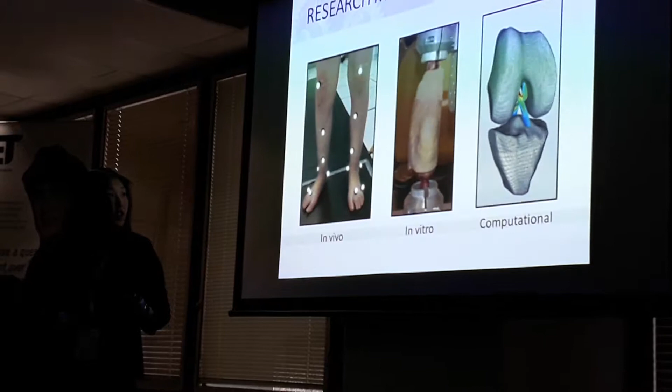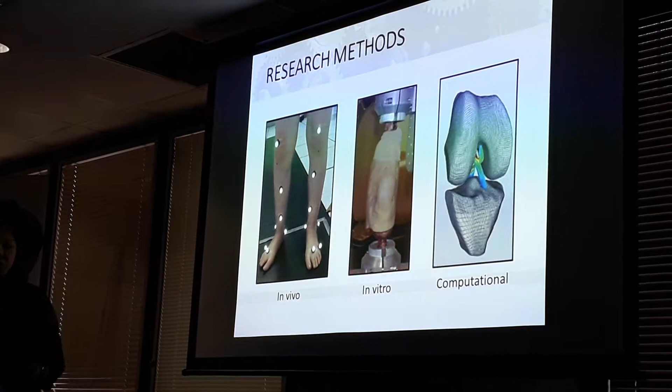So how do we test these musculoskeletal conditions? Well, either we use in vivo methods, which are experiments performed in the body, or in vitro methods, which are performed on knee joints or spinal segments, often done in a robotic simulator. Or we use computational models, which are programs that create virtual models.

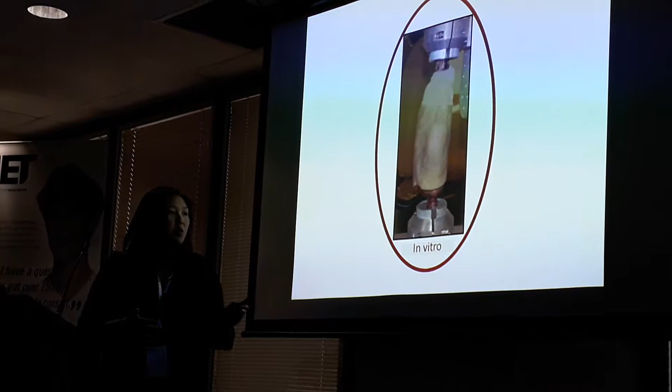So today my presentation is going to revolve around the in vitro method. These in vitro methods are really based on the capabilities of the robotic simulators. So if you have a robotic simulator which is able to simulate many different types of tests for various joints, we will be able to increase the musculoskeletal research performed in those machines.

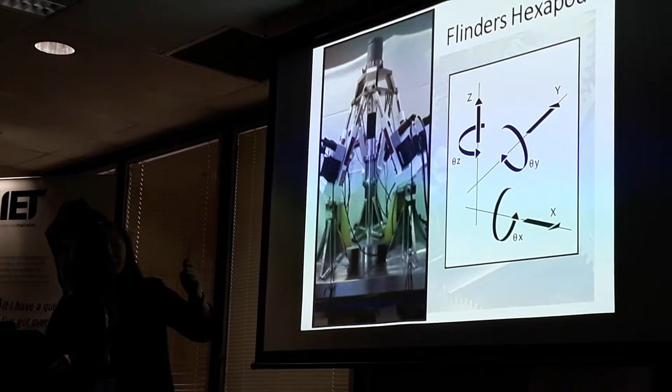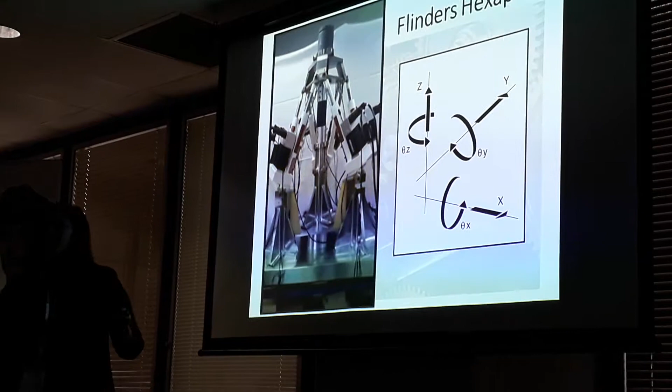So Flinders are lucky enough to have a novel Stewart platform that's supposed to be moving, which is simulated via these 6 legs that extend and retract to form 3D motion. So over here we can see the 6 degrees of freedom, 1 degree of freedom being translation or rotation around a certain axis. So altogether, that's 6 degrees of freedom.

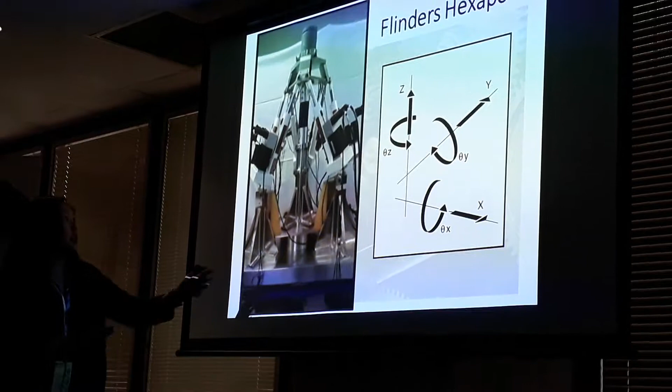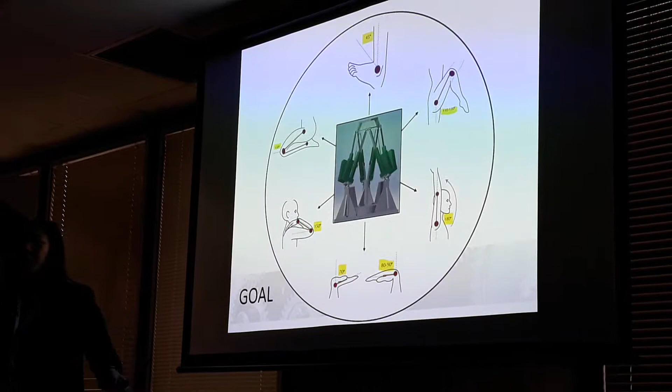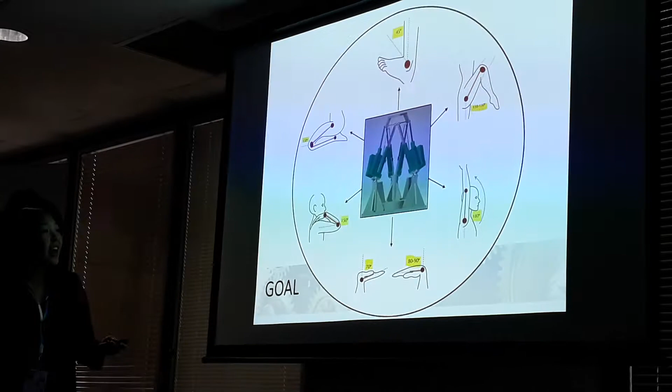It's also important to note that we place the specimen inside the inner space just here, shown by a blue box. So how cool would it be though if we could test all sorts of joints in this robot? At this stage, this robot can only extend to 25 degrees and also flex to 25 degrees. If we're able to test all sorts of joints in this robot, then we can increase the depth of biomechanical research done at Flinders University.

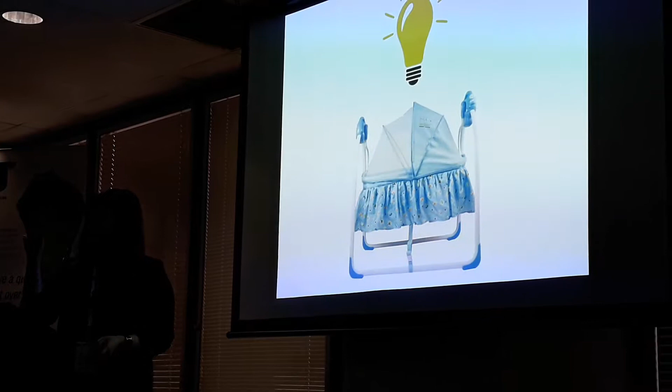So the idea behind this is a baby cradle. What does a baby cradle do? Well, it just swings like this. So we can mimic this by flexing and extending. The cradle flexes and extends to form that motion that we want. We want to place this cradle inside the inner space of the Hexapod just there.

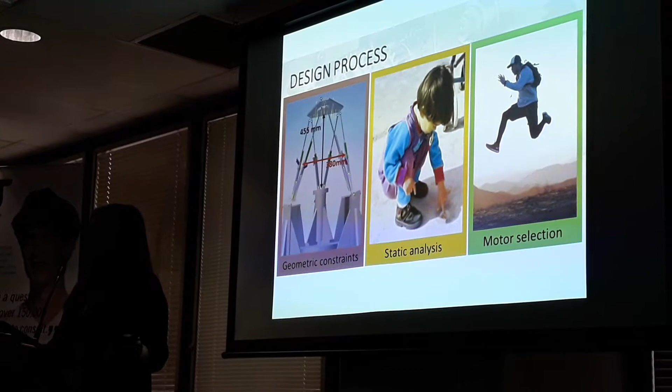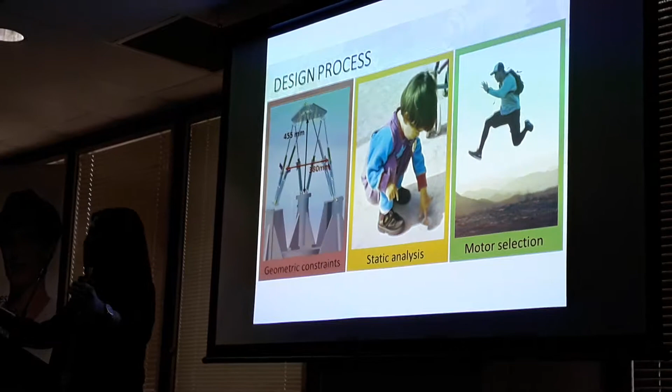So how did I do this? Well, I broke it up into 3 different parts. The first part being analysing the geometric constraints. Really, the space in there is quite tight. We only have 380 millimeters, which is roughly that big, and in height 455, which is roughly that big.

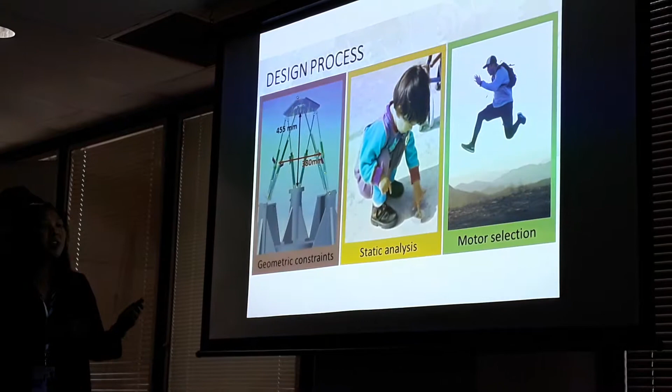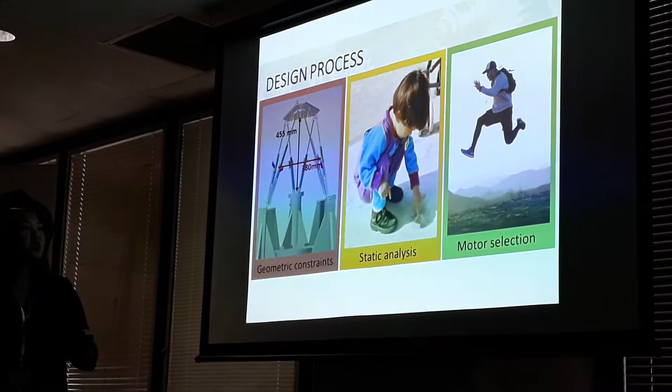So it's actually really hard because we need to analyse the kinematics of this geometry as well as identify any collision points. Second, we need to make sure that the cradle is able to withstand the static loads that might undergo during testing. Third, we also need to be able to simulate the dynamic motions that are going to occur while testing. So I'm going to go through each stage.

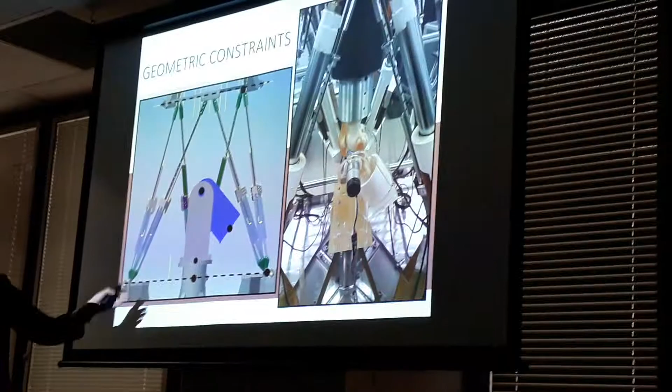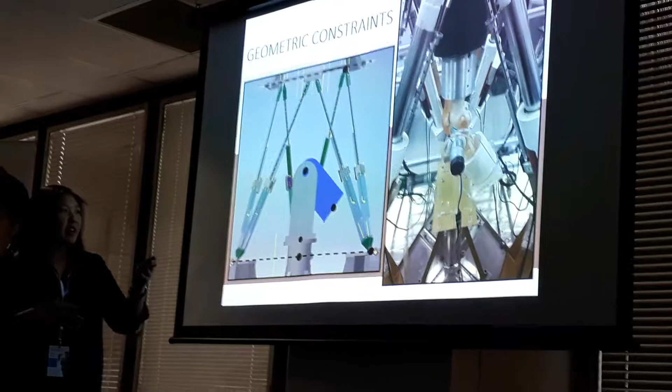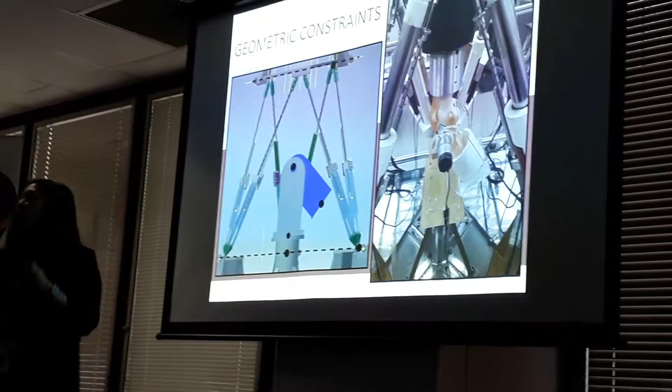So first, we can see here that the encoders and the cradle are quite close. We're going to simulate the cradle motion via Hexapod kinematics, which is based upon the relationship between the bottom encoders and the top encoders. I used 3D vector geometry to relate the cradle to the encoders, which I'll show you coming up.

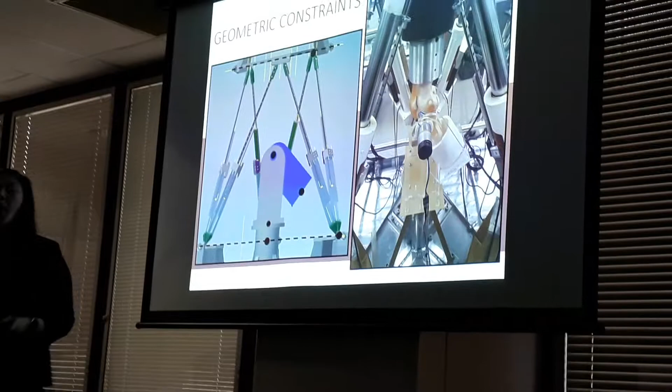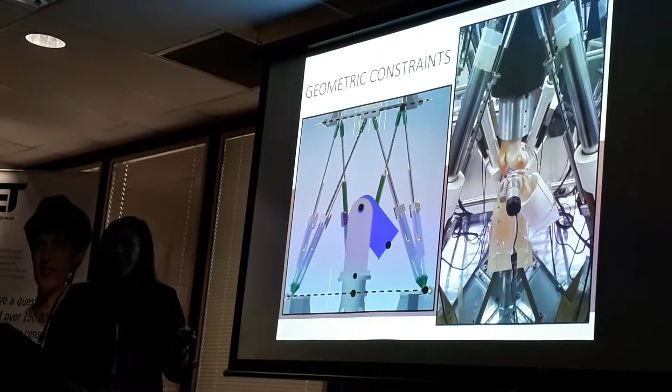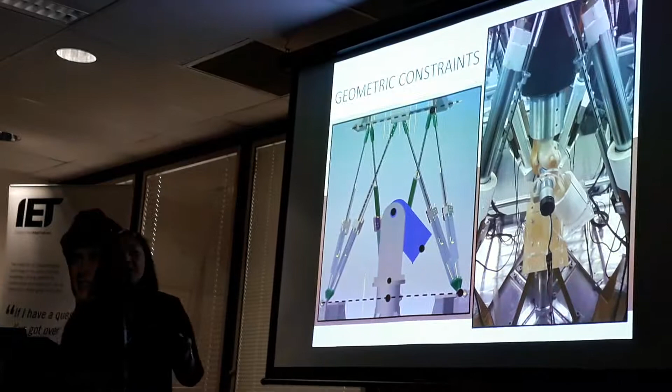But this is just obviously computational, so I had to validate it via a prototype model. So that's over here. As you can see, it's quite hard to see because it's acrylic. So while I hope to challenge your brains, I also am going to challenge your eyesight. This prototype extends and retracts and forms the geometry determined by the computational model. And there, as you can see, is a knee setup in the model.

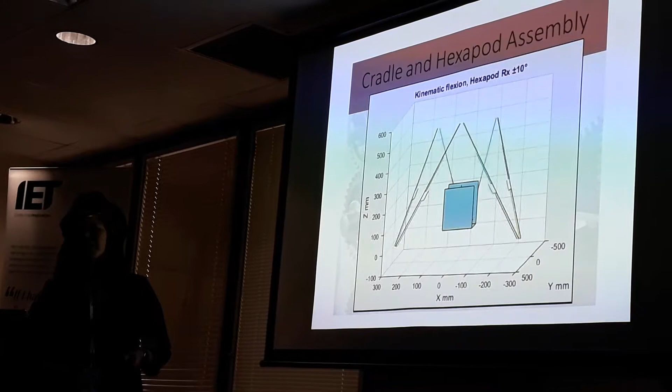So here is the model in dynamic motion. The cradle is flexing and extending in kinematic data, and the Hexapod legs are rotating around plus or minus 10 degrees.

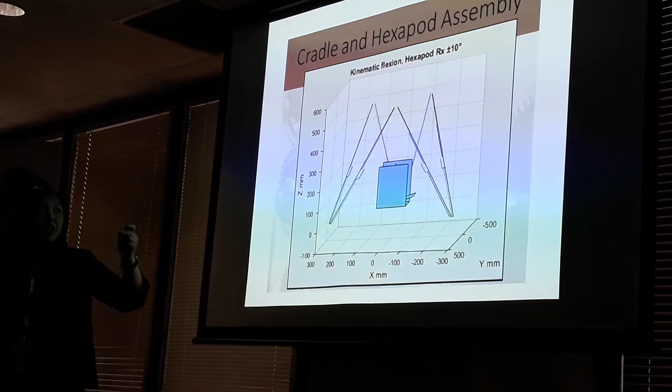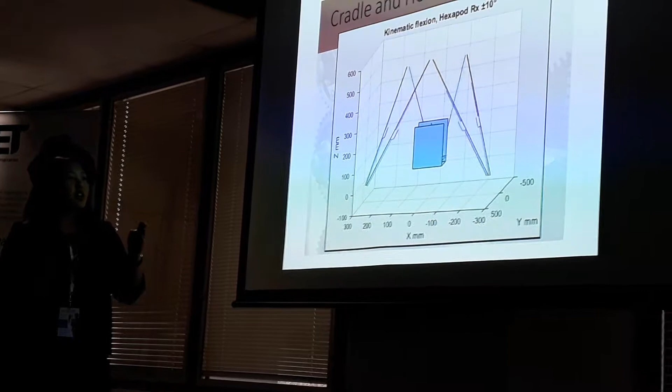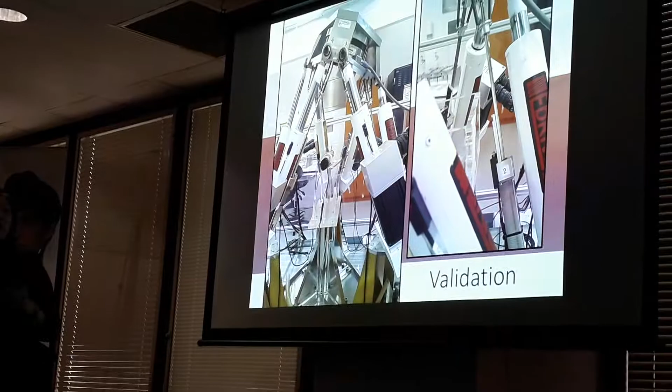From this, we can determine the distance between the cradle and the closest encoder. Basically, all we need to do is determine the encoders at their end range of motion, as well as the cradle at its end ranges of motion. I also validated that through the cradle, as you can see, it's very hard to see, and we drove the cradle to a certain position and measured it. So you've got this way, and then this way.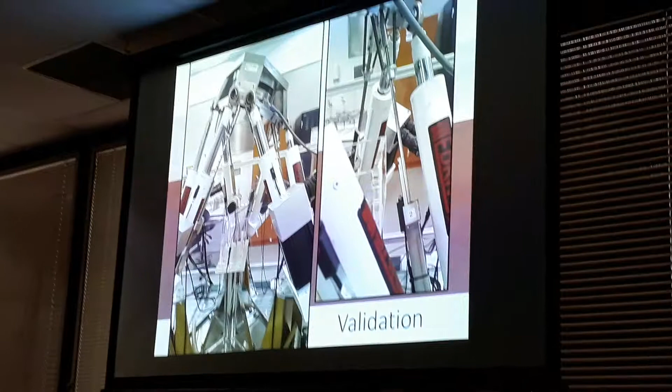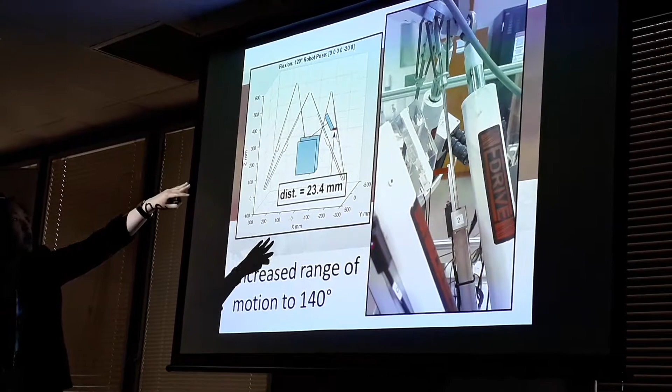So the most important one, noting that the carefully thought out cradle did not collide at any end of the range of motion. The most important part was that we increased the range of motion to 140 degrees by flexing the hexapod to 20 degrees while flexing the cradle to 120 degrees, equaling 140 degrees cradle flexion.

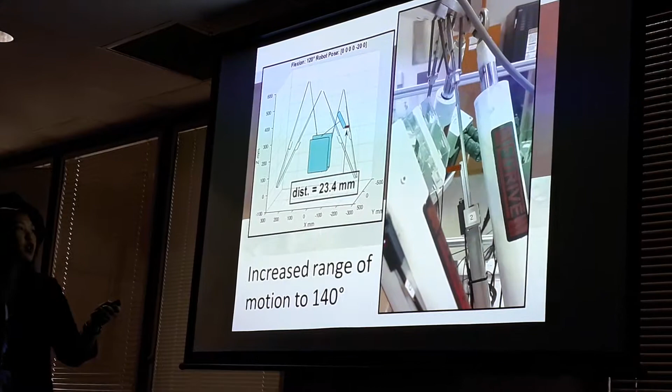As you can see via the computational model, we determined it was 23.4 millimeters. In this model, we also determined it was 23 millimeters, which is a very good correlation.

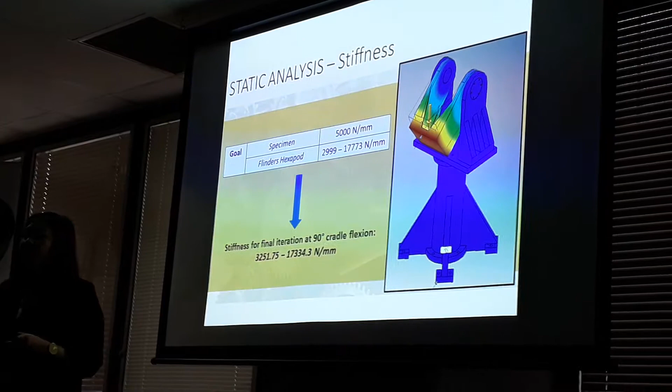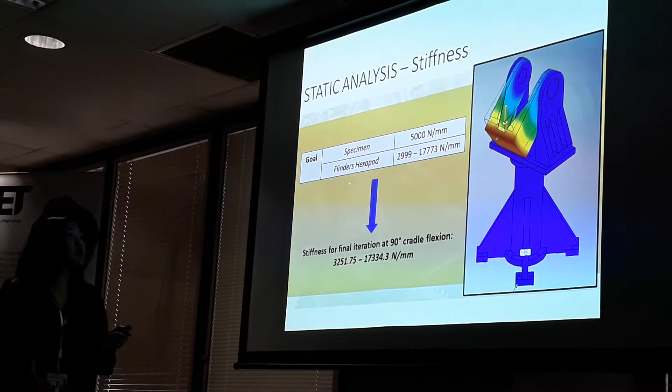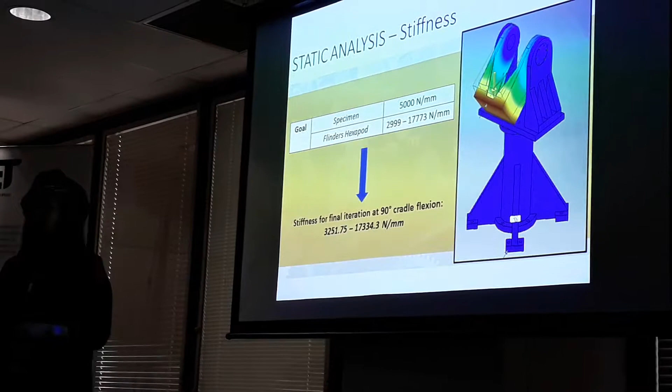Second, we had to analyze the static stiffnesses that the cradle needs to undergo. These were based off of the specimen, roughly around 5,000 Newtons per millimeter, as well as the Flinders Hexapod, which ranges from 2,999 to 17,000 Newtons per millimeter of stiffness. Stiffness being the ability of a structure to withstand deformation.

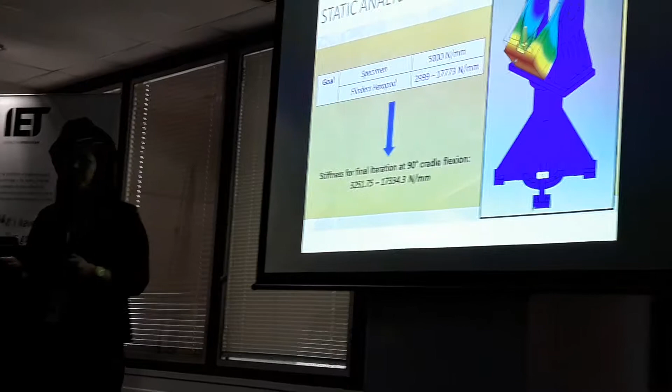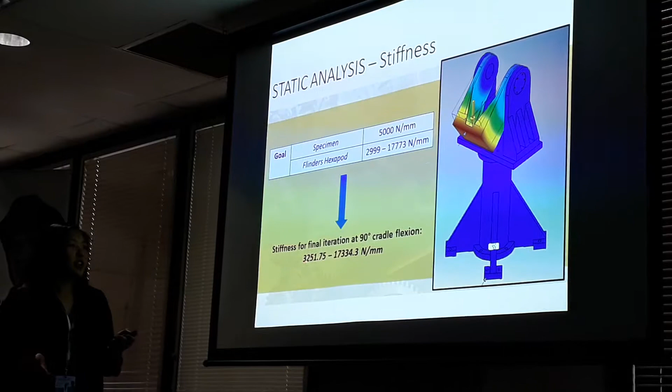Through an optimization process using FEA, we tuned the cradle stiffness so that it matched the goal stiffness, and we found the stiffness to be 3,251 to 17,300 Newtons per millimeter.

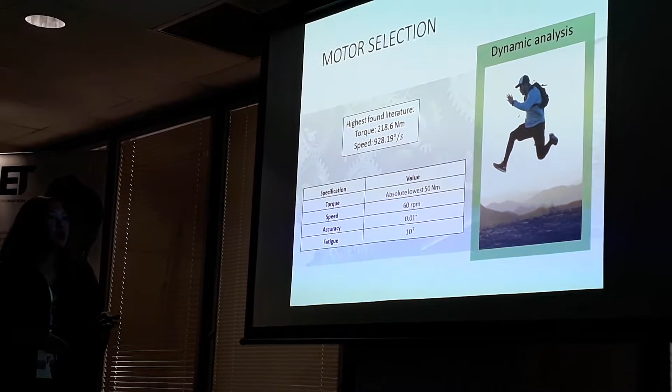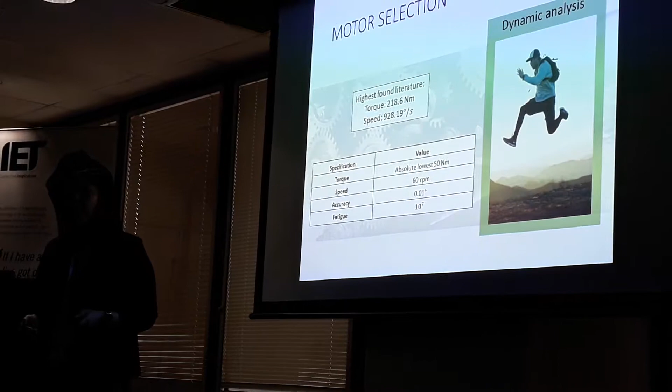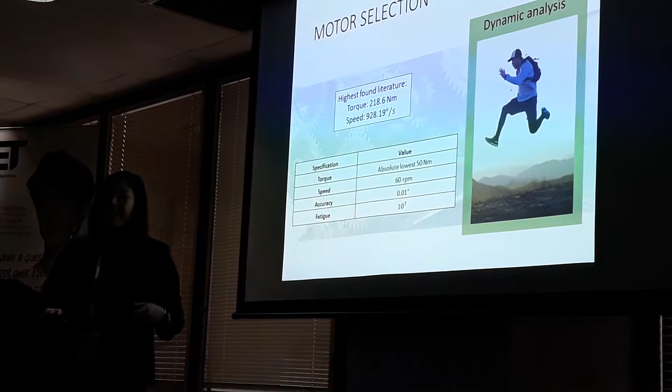Thirdly, we needed to analyze the motor specifications. We need to find a motor capable of simulating this dynamic motion. In the literature, we found high torques of 218 Newton meters and elbow pitch of 928 degrees per second, which is very high and probably unrealistic in a robotic simulator.

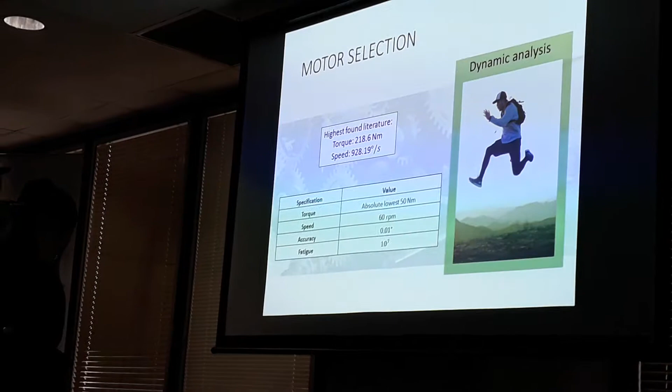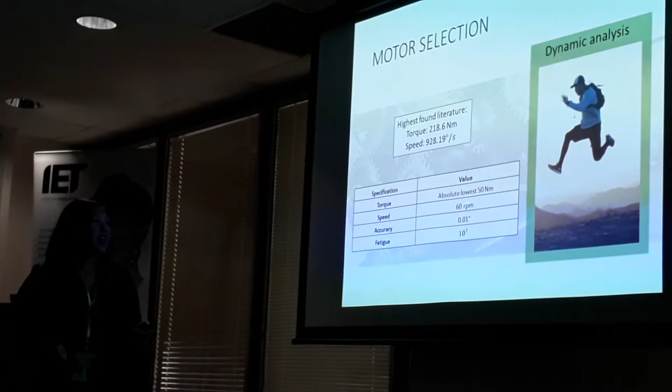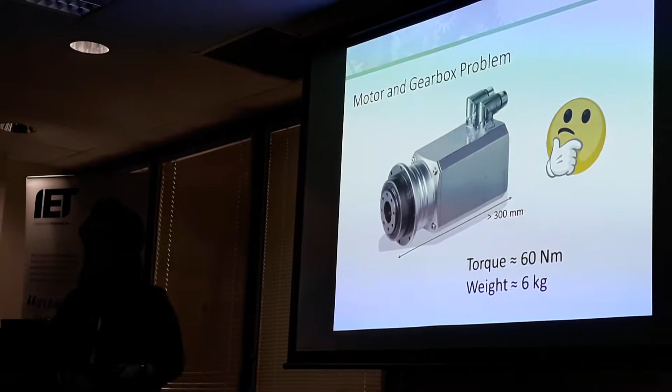By the cradle's structure, as well as figures that would cover the majority of biomechanical tests performed, we were able to distinguish that the torque, at the absolute lowest, was 50 Newton meters that we wanted, 60 RPM, and a high accuracy that matched the hexapods, as well as resistance to fatigue, as biomechanical testing is quite repetitive and cyclic. But the problem is that motors and gearboxes of 60 Newton meters are quite large.

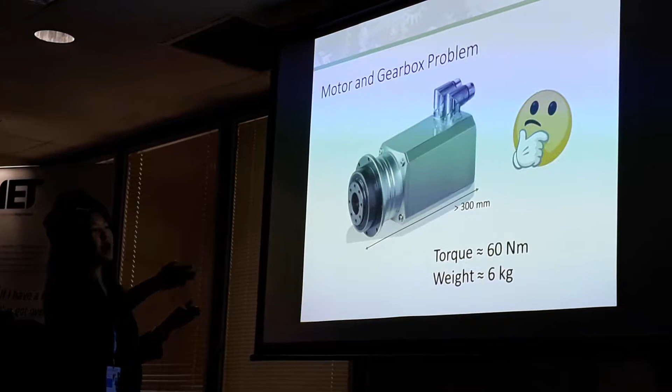There's 300 millimeters here, and as you can recall from before, the hexapod's width was only this big. So it's going to be very hard to fit a normal motor into that space.

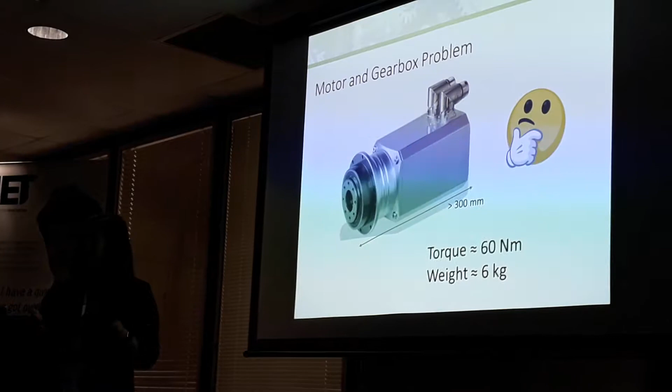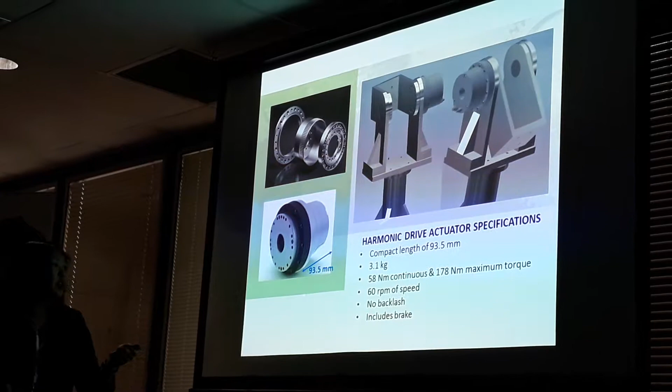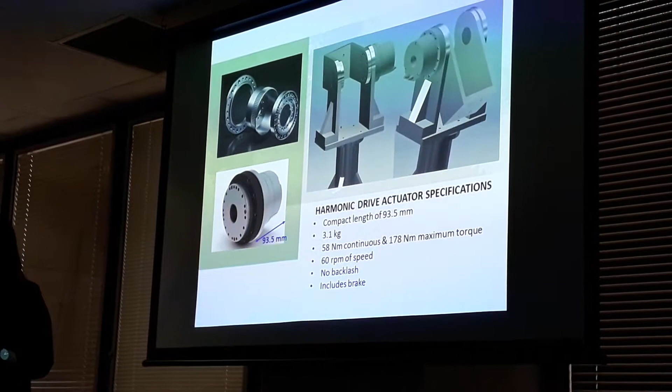Through extensive research, I found a harmonic drive actuator. This actuator had a length of 93.5 millimeters, and it weighed 3.1 kilograms, and it had a torque of 58 Newton meters continuous and 178 Newton meters maximum torque.

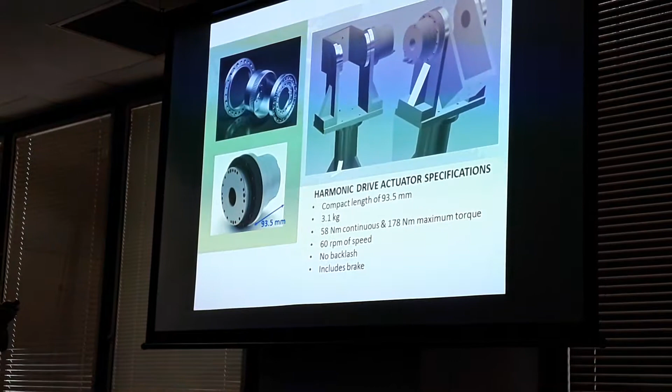So you might be wondering, how does this happen? This happens because of the compact strain wave gear technology that they've used. It's comprised of three components, this one, and this one. This is a wave generator that has an elliptical shape.

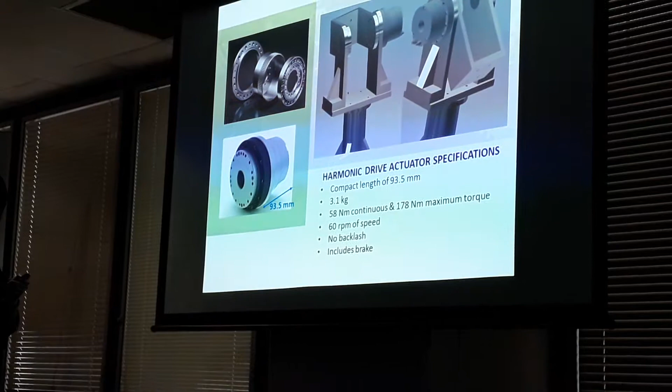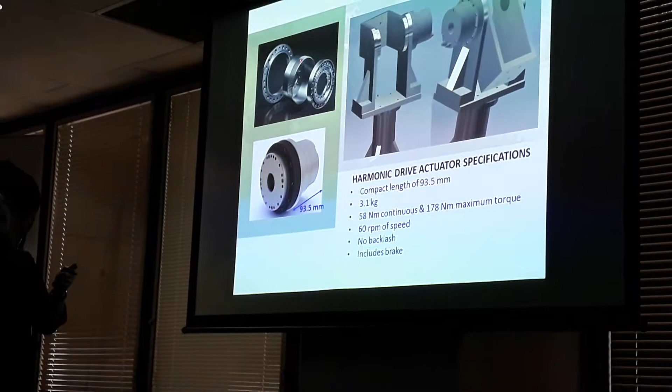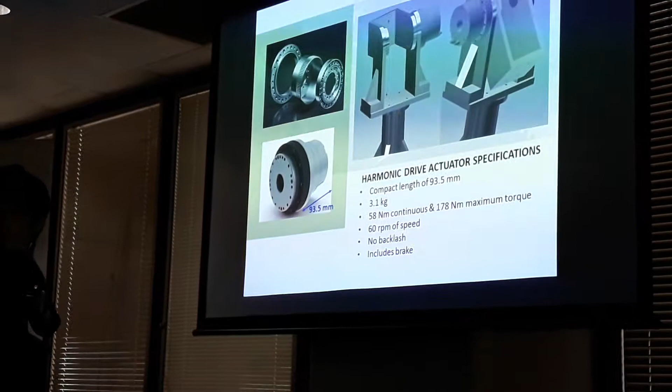Its theory is to move the metal around this circular spline, which then moves this circular spline, and then the teeth move with the teeth of the inner space of this circular one, the back one. So basically this compact gear is the reason why we are able to have this harmonic drive of 93.5 millimeters.

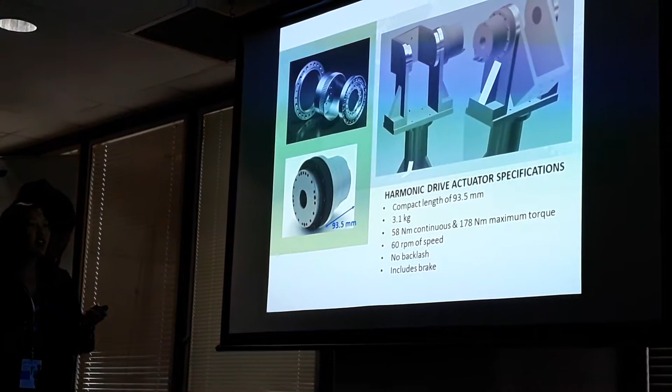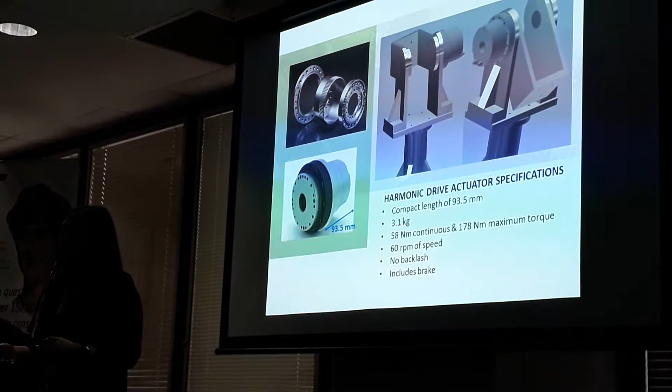It also has a speed of 60 RPM, and it includes no backlash, which means we have high accuracy. It also includes a brake, so we can test stiffness, and we can also perform static testing.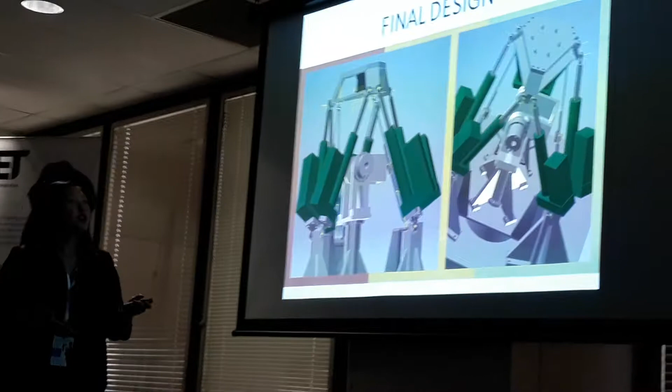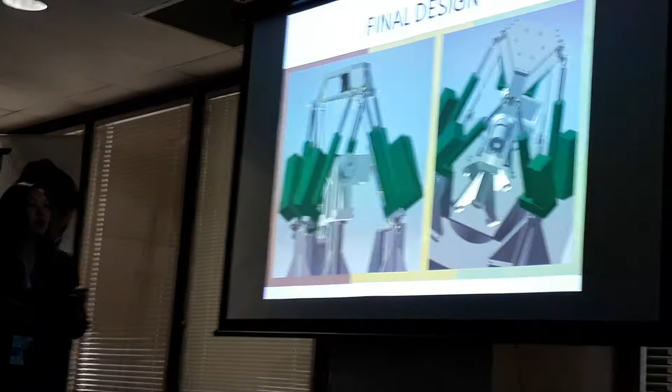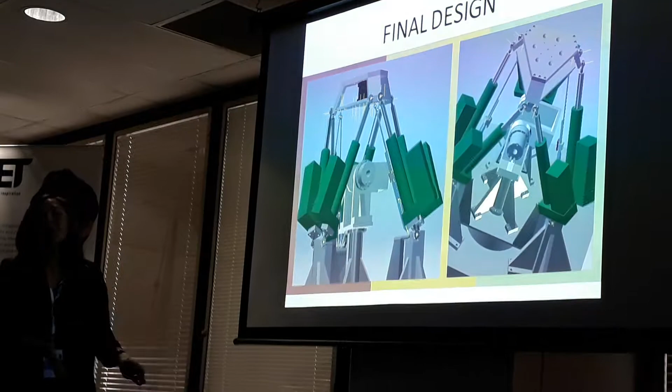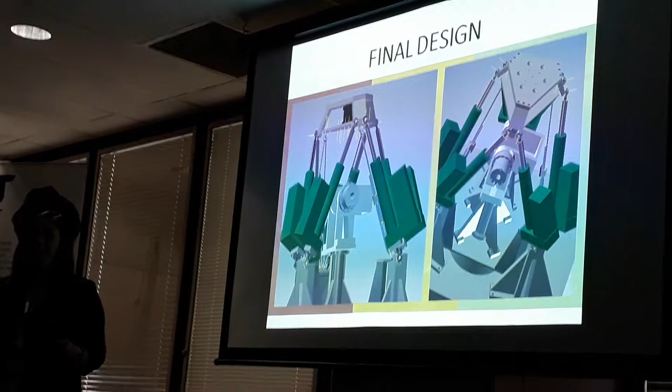So basically, this is our final design, where we're able to mimic physiological loading and motion for most joint testing that can be performed. We are able to increase the range of motion from Hexapod to Heptapod while increasing the biomechanical depth of testing that we can do at Flinders University, which will accelerate our understanding of musculoskeletal conditions. Thank you.

Any questions from the judges?

Yeah, so obviously we'll have to put the design into practice, and then when tests can be performed in the Heptapod, then those results will hopefully be...